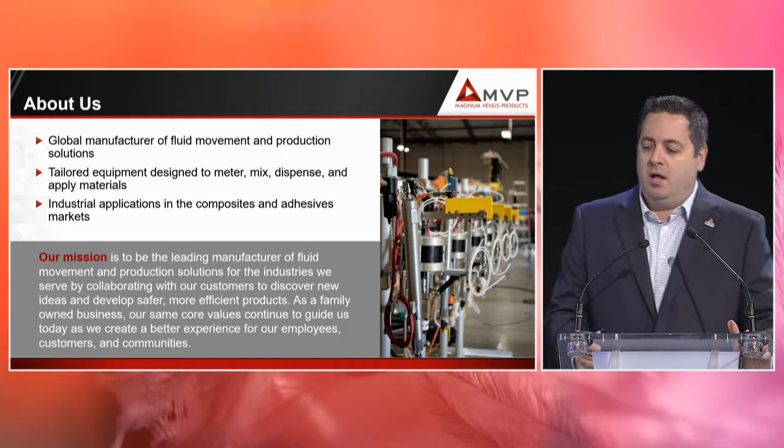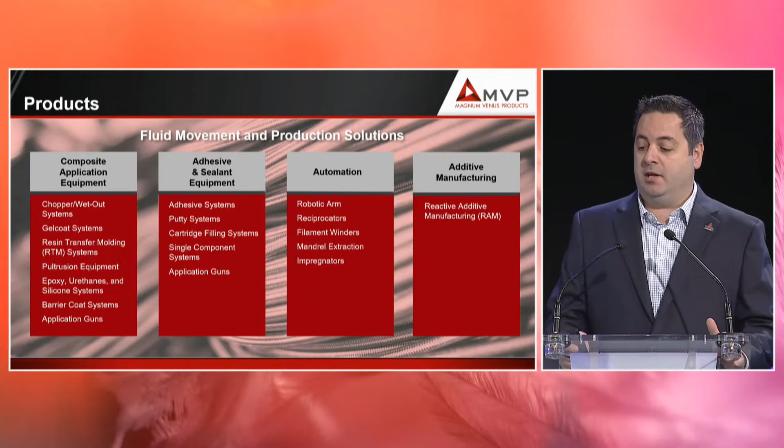Just real quick about Magnum Venus Products. We are a fluid movement machine company. We tailor different units and machinery for precise metering and mixing. Our company is split up into four major buckets: composite application equipment, adhesives equipment, automated solutions, and then additive manufacturing.

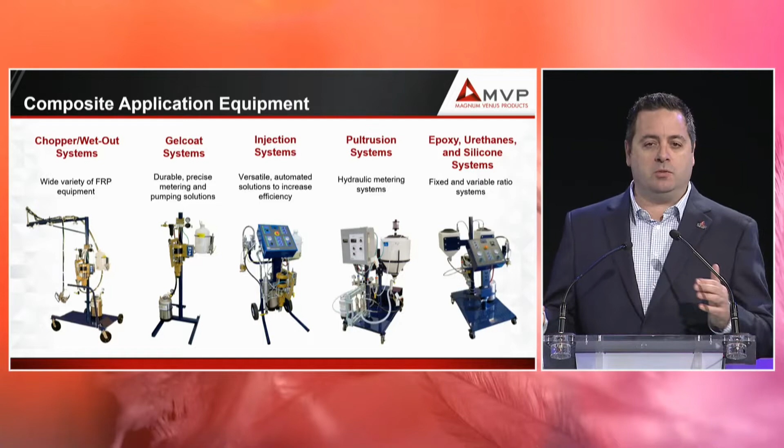Within the composite applications, we have traditional gel and wet out type machines, some higher end injection and closed molding machines. And then adhesives and sealants, we have the things you would think we would have: adhesives and putty systems and single component type machinery. In the automated division, we have filament winders, impregnators, flat panel machines, anything from 2 to 3 to 4-axis filament winders.

And then the additive manufacturing division has two different product offerings: a 4 by 8 foot by 4 foot machine that's 1.3 meters by 2.6 by 1.3 meters, and then a larger one that was sort of our proof of concept with Oak Ridge National Laboratories. And in the middle there you can see it's operated by Siemens Controls, a customized Siemens control package.

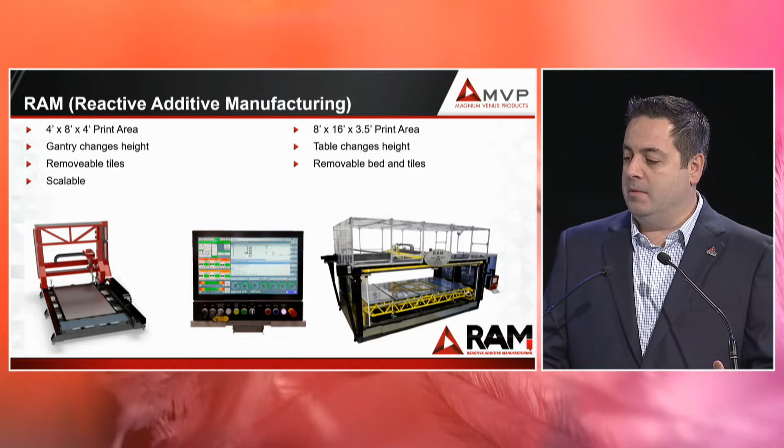So before we get started, I really just want to level set. We're talking about thermosets and not thermoplastics, right? So if you think through what a thermoplastic is, the process of additive manufacturing there for large scale predominantly is you're melting the plastic onto another piece of plastic that's still warm. Whereas in thermosets, it's a chemical bond that's happening. And I liken this to butter versus pancakes, because butter you can heat up and it goes back to the same state, whereas pancakes you can't really unmelt.

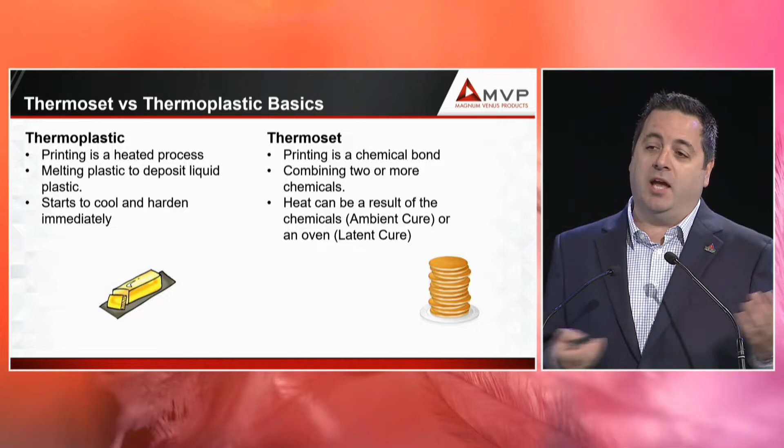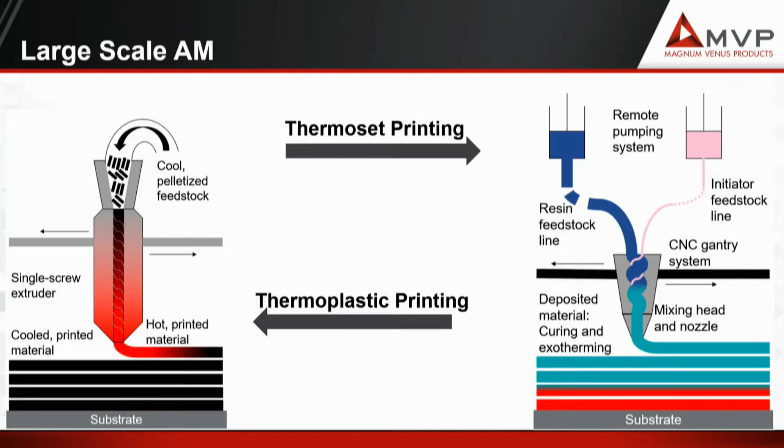To further illustrate this, as the pellets are going in on your left, for a thermoplastic, you're putting pellets in a heated head, and the peak exotherm is at deposition, and then the product starts to cool. In thermosets, you're adding two chemicals or two different materials. It's going down cool, and your peak exotherm, the red, is some time after deposition.

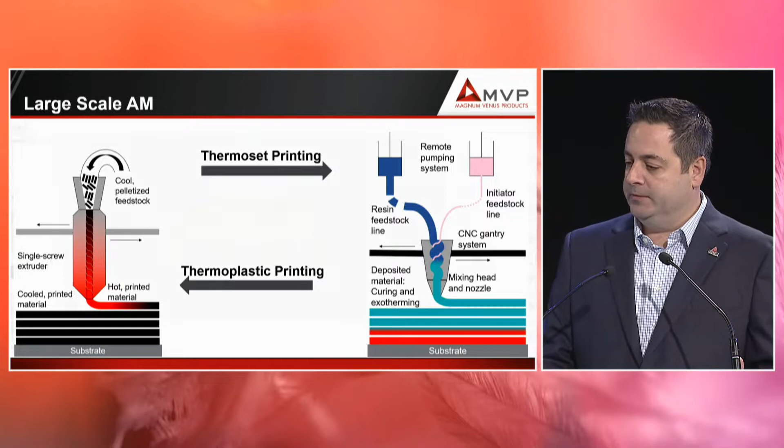To further illustrate that, this is a thermal imaging of one of our processes where you can see the material is going down in this purple color, and you'll see a wave of heat following it. And this is sped up quite a bit, obviously, but you can see that wave of heat that follows the deposition.

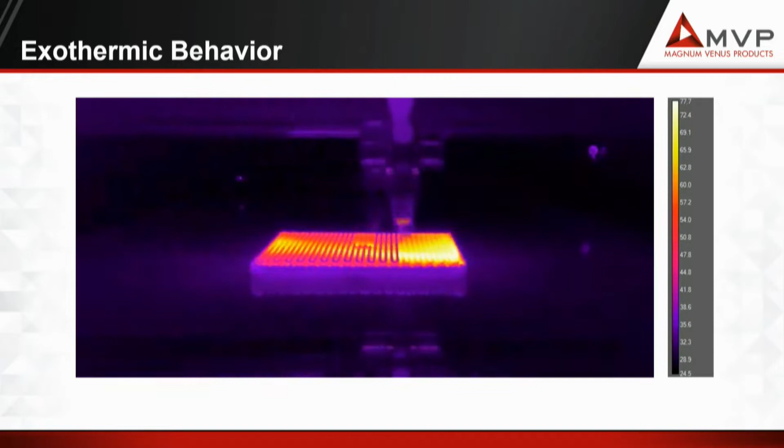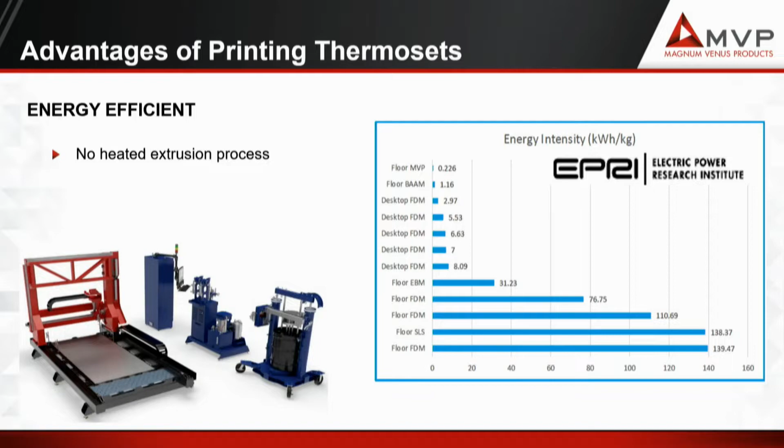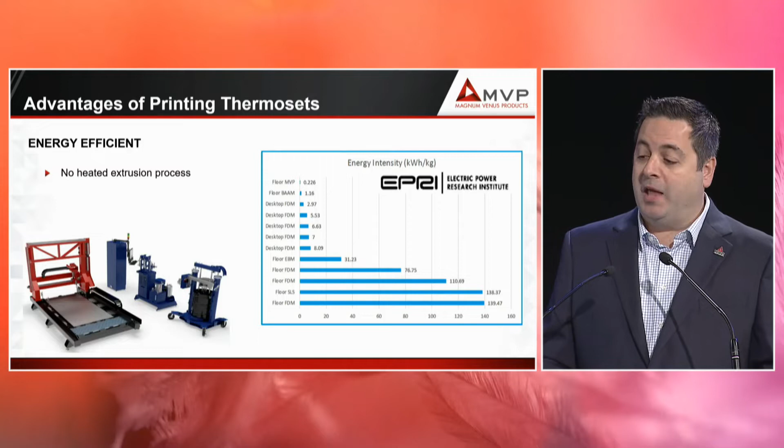So why thermosets? Why start going into this? Well, it is actually a more energy efficient system. You're not having to use heaters to heat up or dry out your pellets. The DOE, Department of Energy, did a study at Oak Ridge National Laboratories and found that we were 5 times more energy efficient than any other machine that they had tested, which included a large-scale thermoplastic machine. But that's really not the most exciting part.

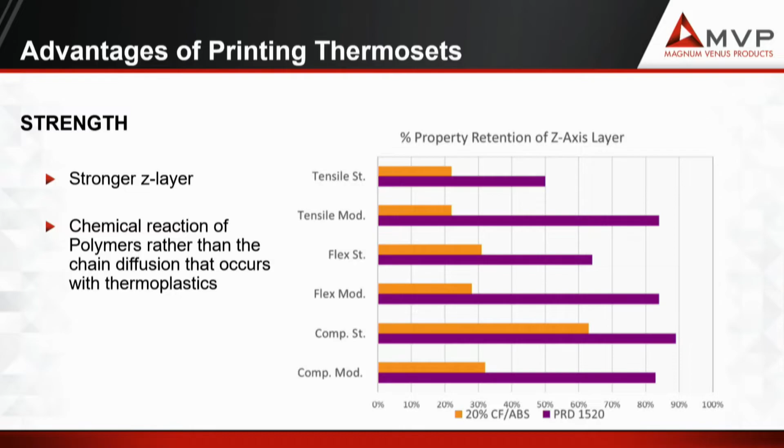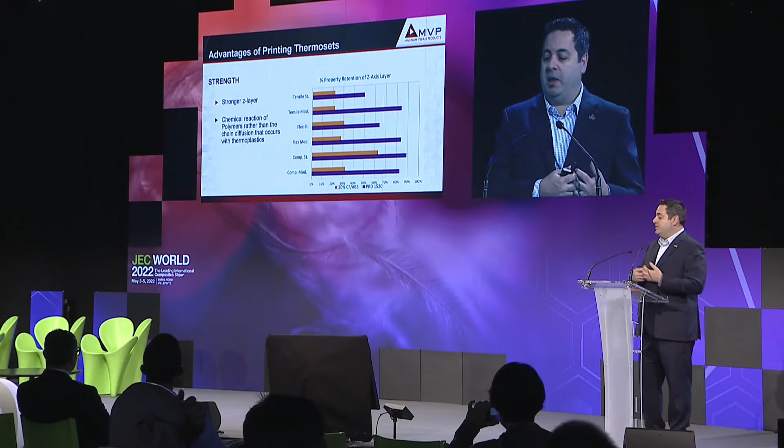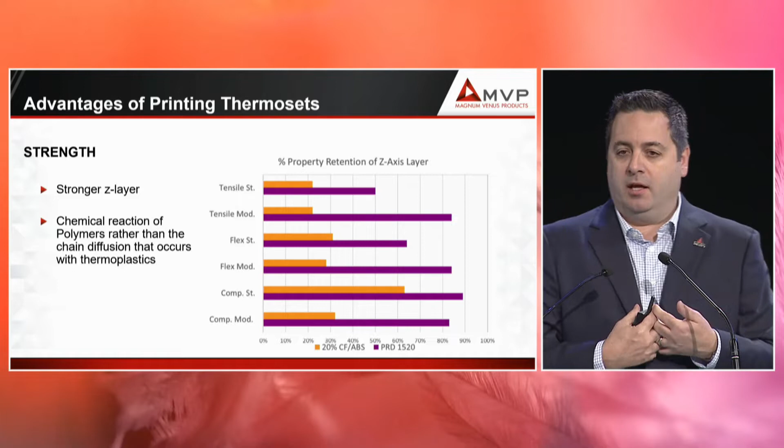One of the biggest advantages of using thermosets is a stronger Z-layer strength, the Z-layer meaning the bead-to-bead interaction. And again, this comes from a chemical reaction, not a thermal reaction. Some test data here: the orange represents 20% carbon fiber-filled ABS versus base material from Polynt, PRD. And you can see the tensile retention strength properties are much lower in the orange, the thermoplastic, than in the thermosets. It really comes down to this: at the molecular level, you're entangling the fibers, you're entangling the different molecules.

Thermosets are also more heat tolerant. You have a higher Tg in most cases with thermosets. You also have a reduction in thermal expansion. So with the product that you're printing, and we've done mostly molds to start with, as you're using the mold, it heats up. As the mold heats up, you start to get expansion, and this has been a big problem over the decades we've been using them. With thermosets, you're getting less of that.

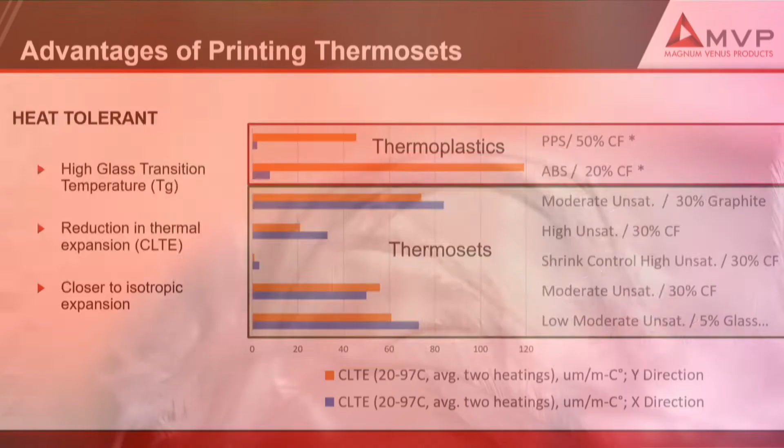And so this graph illustrates in the orange the Y direction expansion versus the X direction. In the top two examples, you have this really short expansion in the X direction and a longer expansion in the Y direction, in many cases 10 times more. That's really because as you're printing, the fibers contained inside the material are lining up in the X direction, and they're holding back that print. They don't do that in the Y direction, so you get this enormous distribution of change in your print or in your mold, whatever it is.

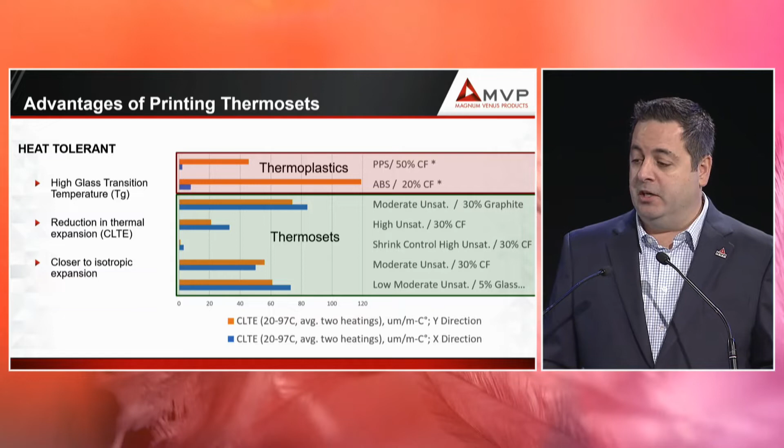In thermosets, that retention is much higher because of the entanglement and because you're using a chemical reaction. So we're getting closer to isotropic expansion, and we do have a few other experimental materials we're working with that we hope will get to isotropic expansion.

Because there's this chemical bond, you have what we're calling an open layer time, meaning you don't have to come back and put your material back at a time frame in the same way you do with thermoplastics. In thermoplastics, you're melting that material, and you're using that heat, that melting process to put those two pieces back together. In many cases, you have a limited amount of time to come back to that previous layer. Otherwise, you lose the print because there is no retention between those layers.

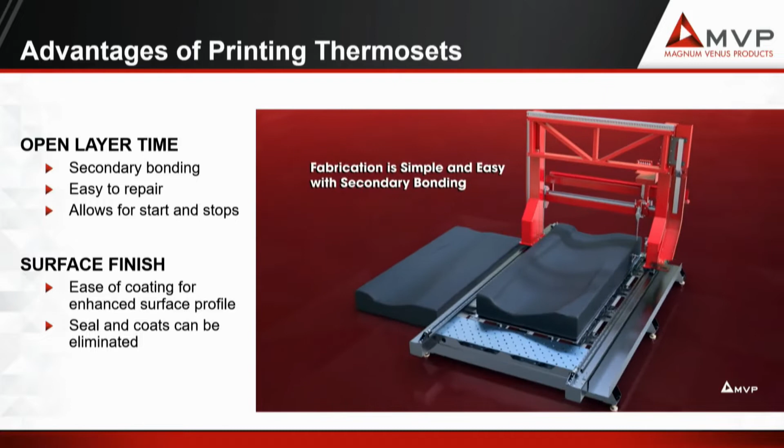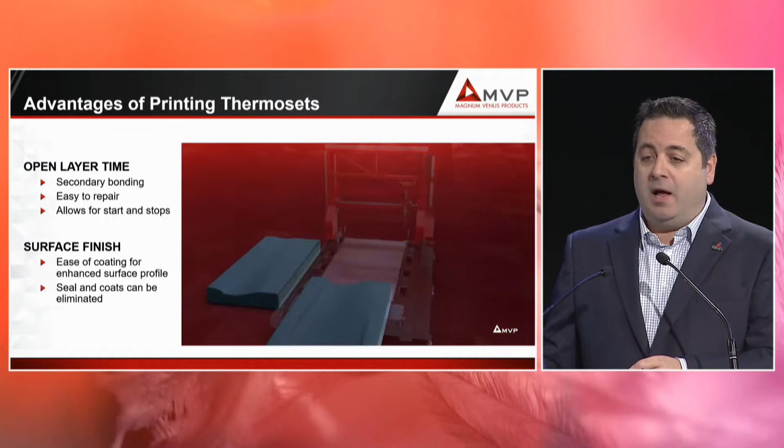With thermosets, you don't have that, so you can literally join two pieces together once you've printed them with the same material. And I have some real-world examples here in a minute. It also allows you to easily modify or repair a mold or whatever you're working with. If you want a version 2 of a part, you quite literally can mill out or break out that part, reapply the same material, and then go back to the CNC machine.

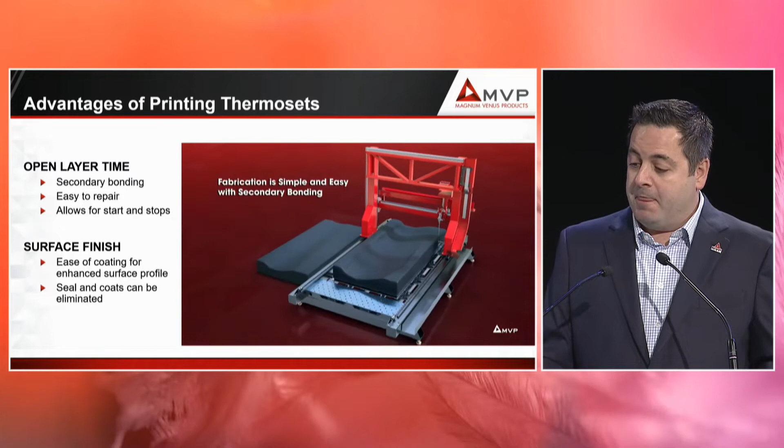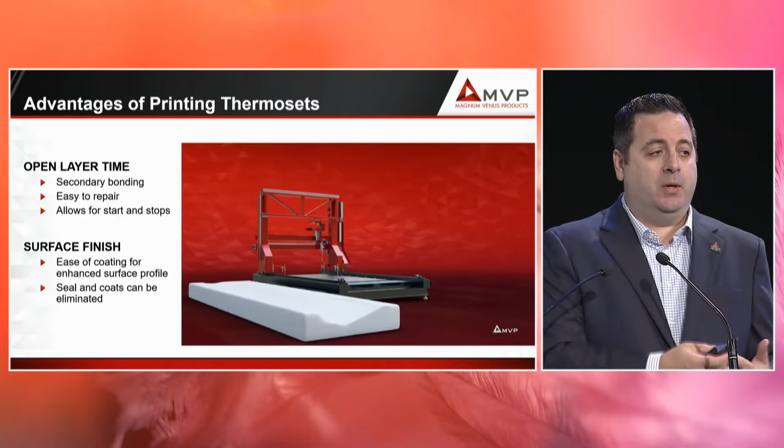It also allows you to start and stop in the middle of a print, meaning you can quite literally print part of your print, go home for the night, and come back the next day and continue printing and still have the same characteristics. And again, I'm going to show you an example of that in a minute here. The open layer time, as well as it being a thermoset to begin with, allows you to have different finishing products put on, or the same finishing products that you may be using in your traditional process already.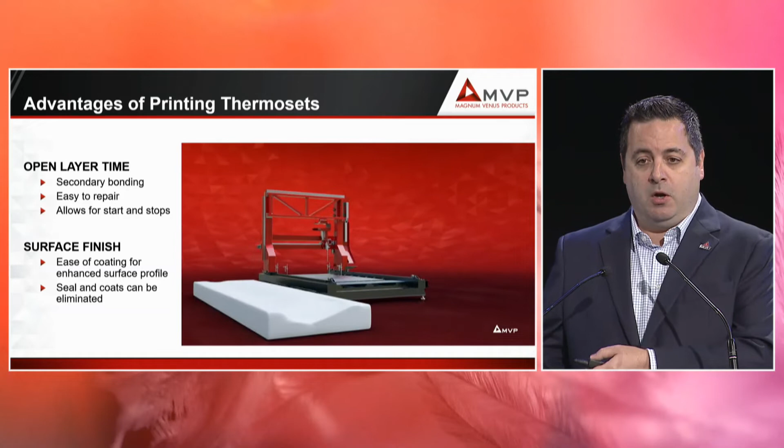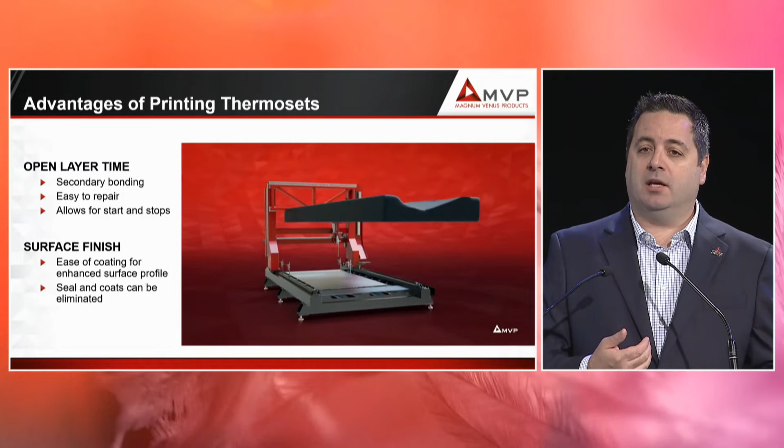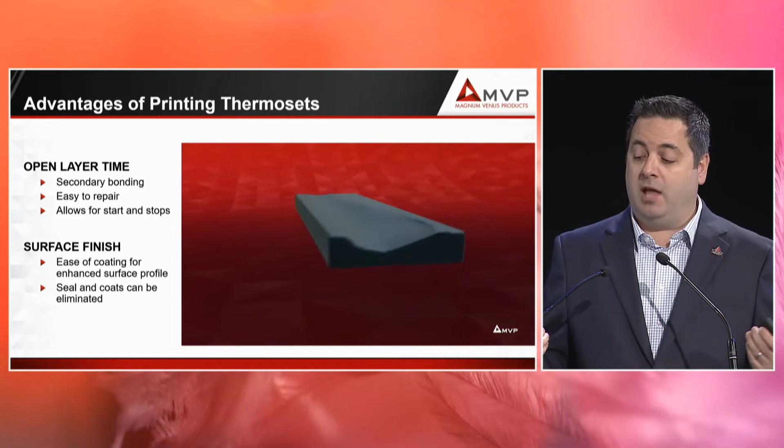Because you're putting a thermoset, a lot of times your finishing coats are thermoset, and you're putting that on to your mold. Well, when you're using a thermoplastic mold, a lot of times you'll see delamination because the thermoplastic is expanding, because that CLTE is much different than your thermoset. So if you're heating that mold up or that part up, you will see or could see delamination, whereas you don't see that in the thermosets. As well as it's just easier to apply to a thermoset.

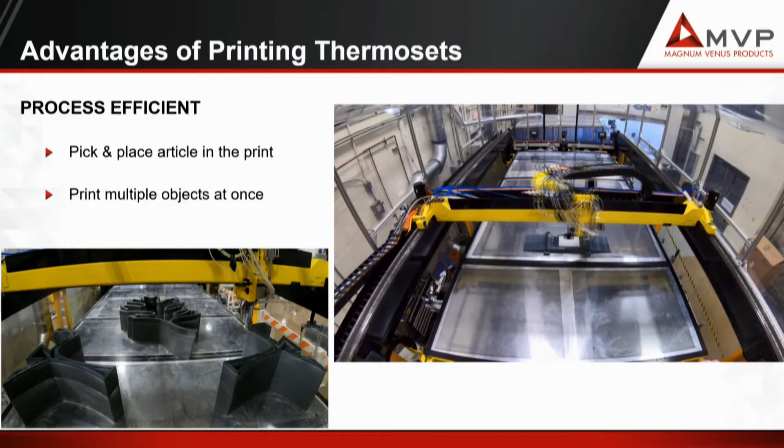The last advantage I have here is you're able to print in multiple parts. In the bottom left picture, we actually printed all 3 of those parts at the same time, each layer as it came up. And as you can see, 2 of the 3 are a mirror image, but the third is a completely different shape. And although thermosets do print slower, you can do multiple parts at the same time and gain efficiencies. You also gain efficiencies later because they're much easier to mill than thermoplastics.

You're also able to pick or index. In the video, you can see there's a square that's being indexed into the print. And the machine actually goes over, grabs a piece of foam, drops it into the part, continues to print, and actually prints over top of it. So now if you're thinking about, say, lightweighting a part, you can drop a piece into it, and you may not need the arm to do it. You could physically put it in.

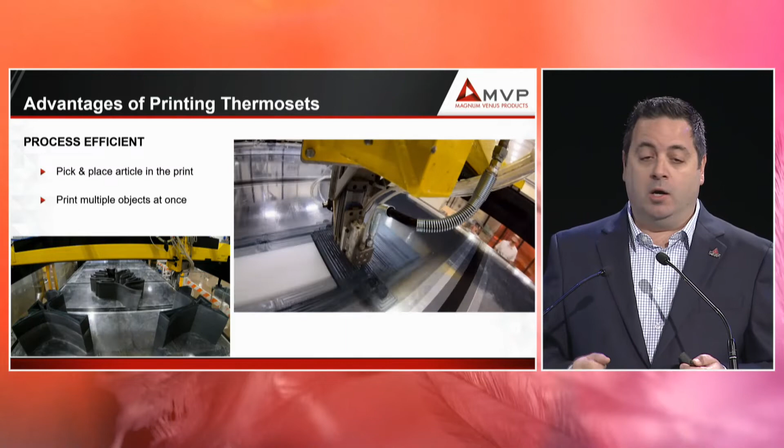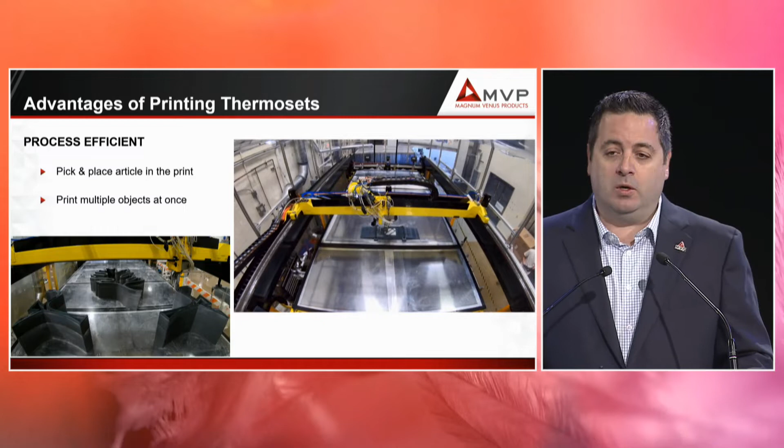Or if you wanted to put in heating channels or cooling channels or sensors to check the degradation of the tool, or sensors to see what temperatures you're at, it's very easy to do with this. Again, it goes back to this open layer time, that you're not under this time crunch to get your layers back on top of each other. And those layers can be tailored whether you want them to cure 1 layer deep or 7 layers deep.

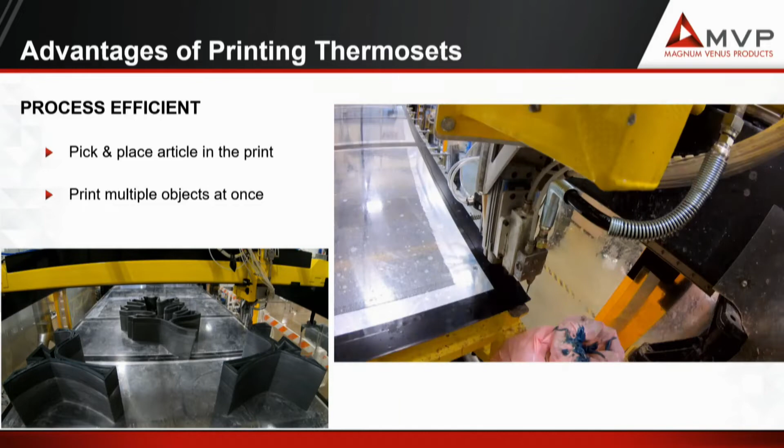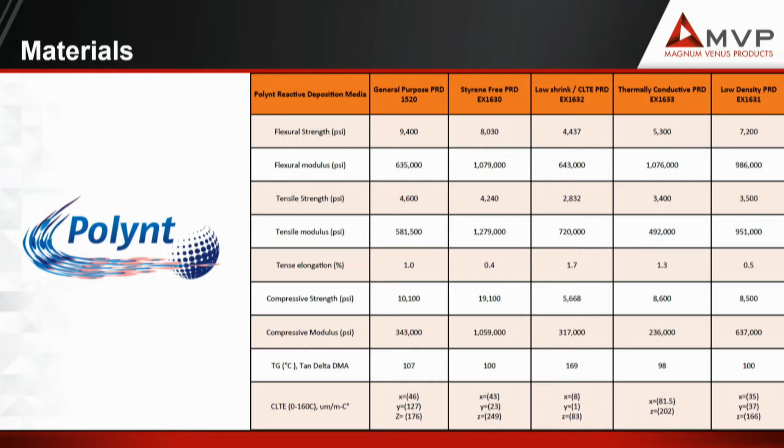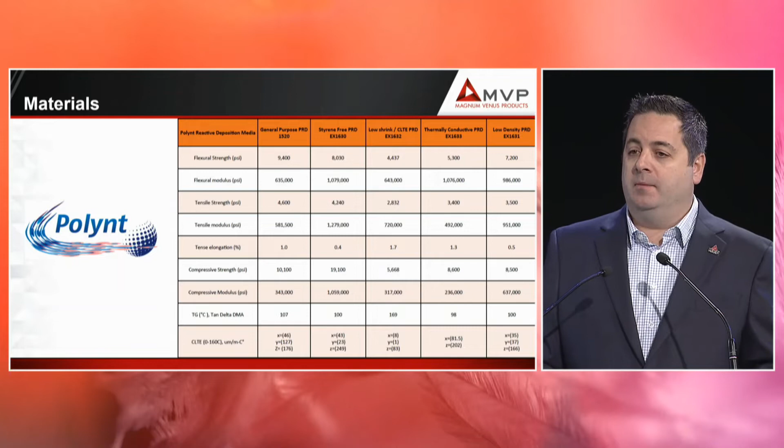We've done material applications on 2 of the materials so far, the PRD 1520 and the PRD, I always forget the number, the 1632, so one is carbon fiber based and one is glass filled. But what's really exciting is the middle material: you can see on the bottom the CLTE is very, very small, and this is approaching aluminum in the sense of the expansion rates that you're seeing in tooling, as well as the TG, the temperatures you can produce to. So we're at the low end of autoclave tooling and have plans to be into full aerospace autoclave tooling with the pressures.

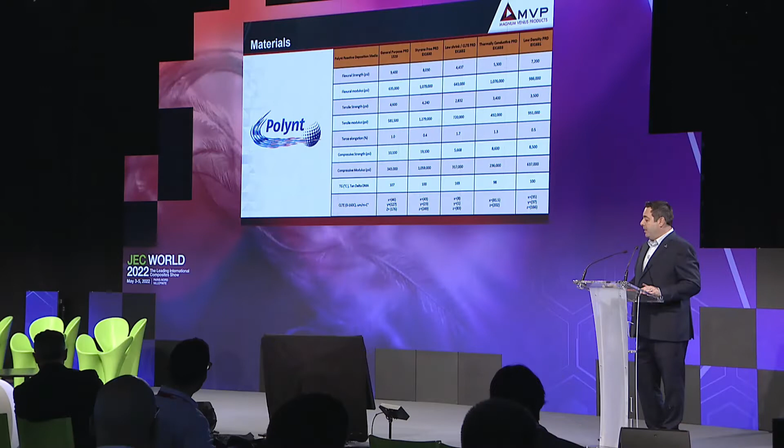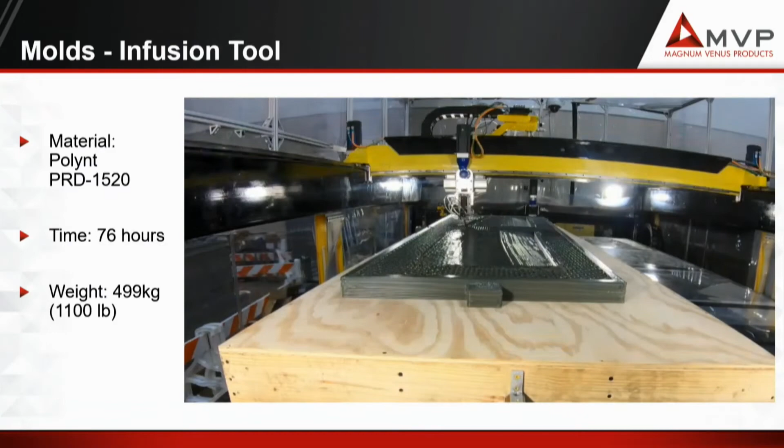So this is an example of one of the molds we've produced. This was an infusion tool. This print was done with the PRD 1520, and the print time did take 76 hours. So that's the actual print time that we were laying down material. But the actual time this took was about 3.5 weeks, because this was printed in coordination with Oak Ridge National Laboratory. This is the first machine that we put, and they've helped collaborate with us.

But in the middle of it, the operators were put into COVID protocol, and they literally could not get in the building for 10 days. And right about here, actually, it's right in the middle of it, we had to stop the print, and we came back 10 days later and started to print it. Now that was not planned, but the print still worked.

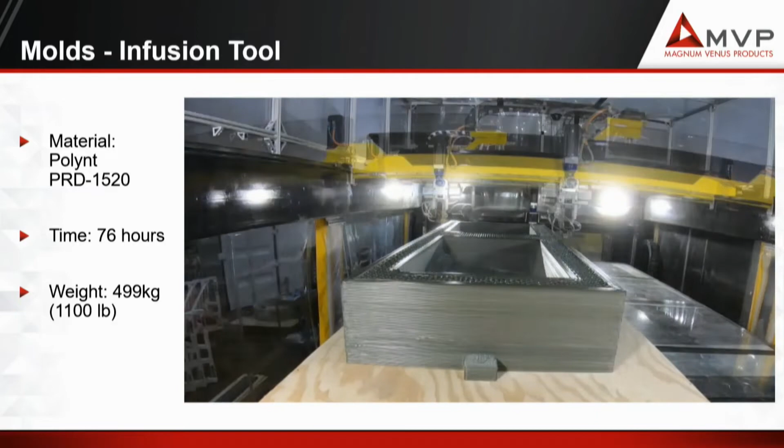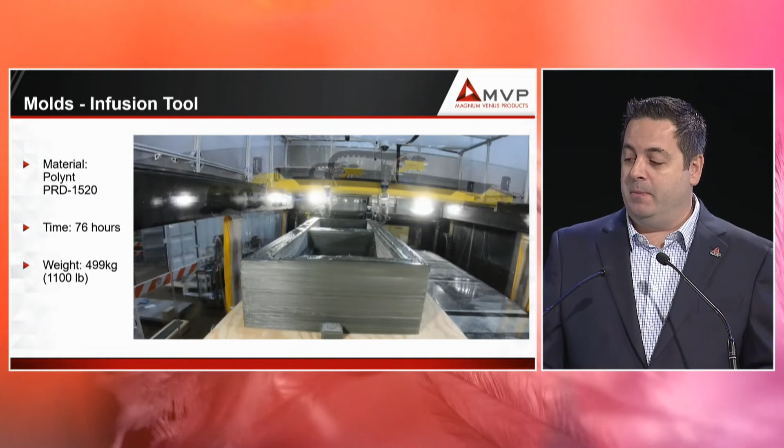You can also see the lights kind of going off and on there. Now some of the times they were working in the middle of the night and the lights were going off, but other times the first couple days they printed and they went home and they came back and printed. That was planned, but the 10-day COVID was not planned. And this print did end up being just around 1,100 pounds. The dimensions on this: it's 10 feet deep into the screen, about 3 feet wide, and about 2.5 feet tall.

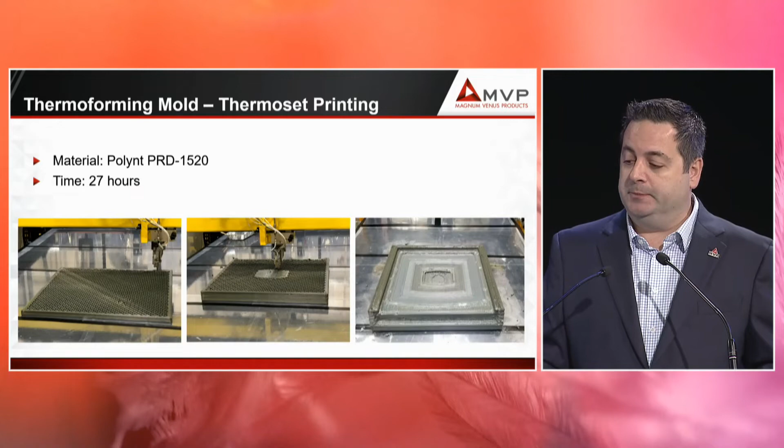So then that mold was taken to a CNC and was done on a 5-axis machine here. That took 16 hours. And again, as I mentioned before, the milling on thermosets is typically faster than the printing. On thermoplastics, it's just the opposite, because in many cases, as you're milling, you're heating up whatever material you're milling, and the thermoplastic can't withstand that heat. You'll quite literally melt it again, like the butter. And so you have to go much slower on that. And in many cases, milling in a thermoplastic is anywhere from 2 to 5 times what it took to print it.

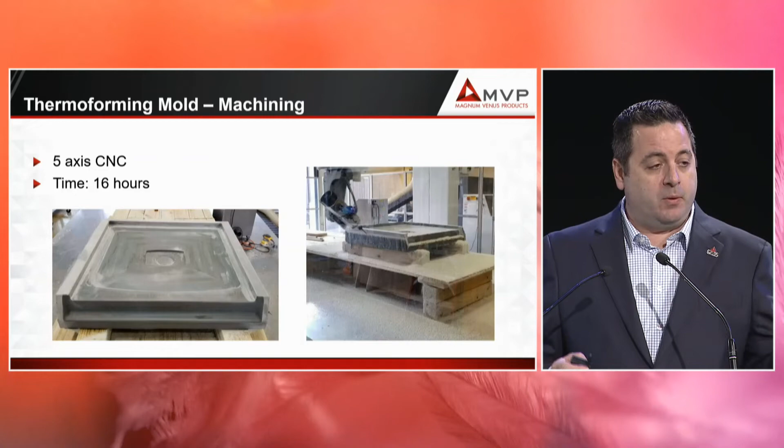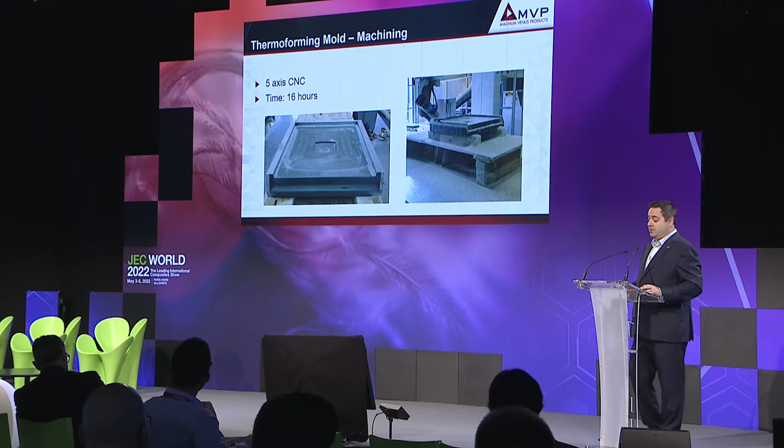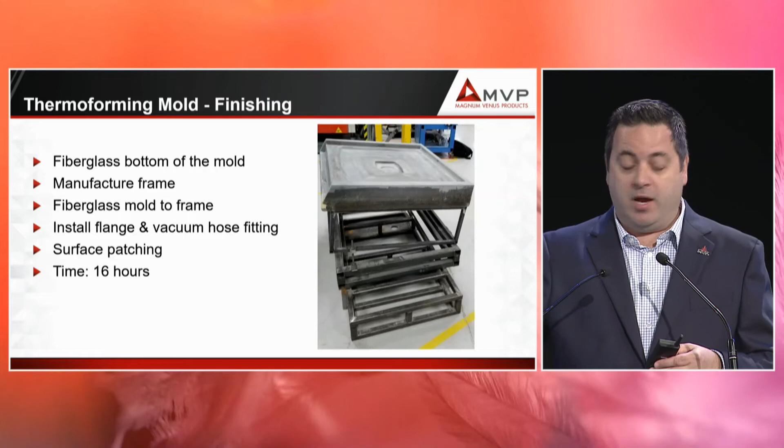And so if you think about this, the timeline of going from a CAD file or an idea all the way to the end product, there's 9 to 11 steps that you have to take to get there. And printing and milling is just a couple of them, and you can offset those by different efficiencies. And our efficiency is that you can mill faster and it's easy to mill. So after it was milled, we took it to the finishing shop, and they fiberglassed the bottom to seal it because it did start with sparse. They added ports for the vacuum, drilled some holes and built a frame, and that took 16 hours.

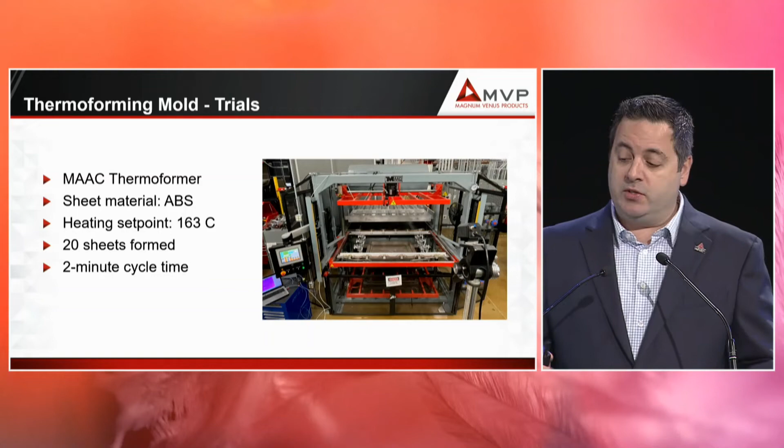So then this is at Oak Ridge National Laboratory where some of the trials were held. Using ABS sheets of plastic, the sheets go in and they're heated at 163 degrees C, and they come out. And the test was done with 20 sheets continuously with a 2-minute cycle time. And this is a quick video of it. On the left is the sheet coming out of the heat, and I'm going to start the other side. And the other side is the thermal imaging of it.

And so the sheet comes down, vacuum's applied, and it sucks it down on there, and you can see it's now formed. The one on the right, that sheet comes out really hot. Again, it gets sucked down, and you can see it cooling. Now this is sped up a little bit on the right-hand side, and you'll see it pop right off there in a second. It pops off, and the cycle continues. Again, every 2 minutes that goes through, and the mold is still in use and still able to be used.

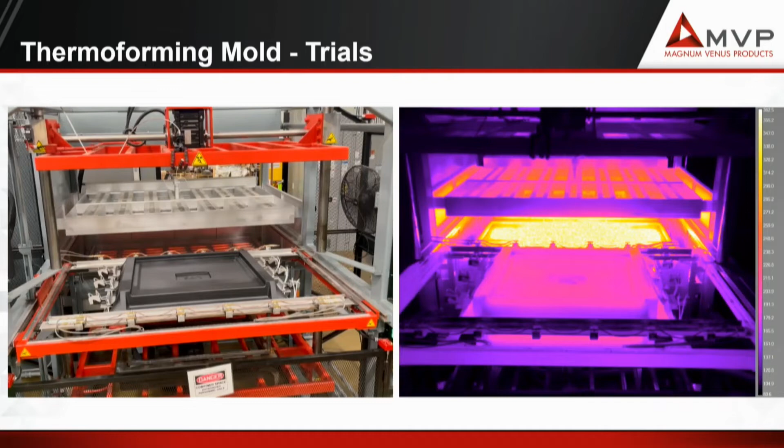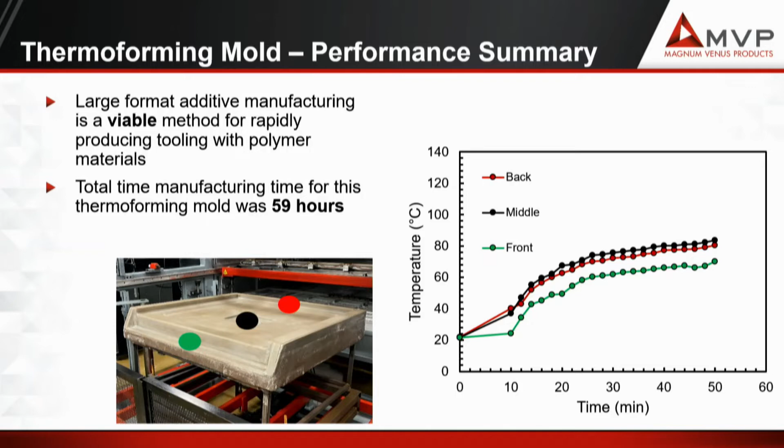So to complete that case study, it was found that this is a viable way to produce a mold, and the total time took 59 hours. And you can see we did measure temperature over the period of the trials, and no part of it ever reached above 100 C.

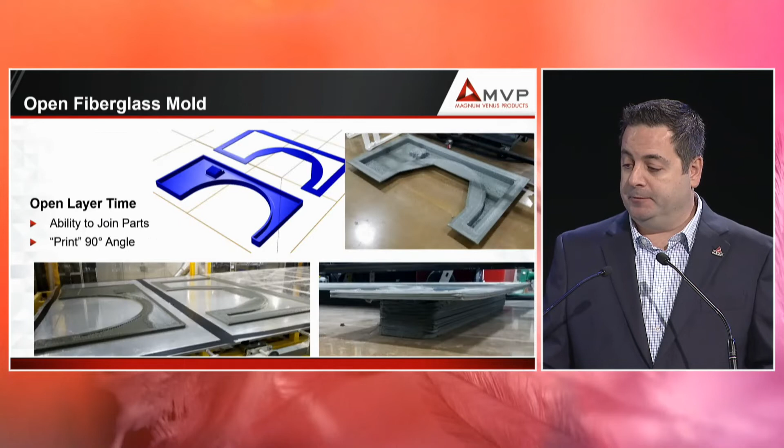As I mentioned earlier, you're able to do multiple parts at once. So this was a mold that we were an ACE finalist at for CAMX. The mold here is a traditional open fiberglass mold for a wheel well. That's a wheel well of a mobile home. And it was printed in 2 parts, as you can see both in the illustration from the slicing software in the bottom.

So the first couple layers are printed. The flange is done. The walls of the well can keep going up. The walls of the well were finished. Let that start to cure. We picked up the flange, set it on top of the well. We did add a little bit of weight to it to kind of help push down and keep the flange there. And it was able to cure into one piece. And effectively, we printed a 90-degree angle with no support structure, therefore saving weight, saving cost, and really showcasing that a traditional mold can be made very quickly.

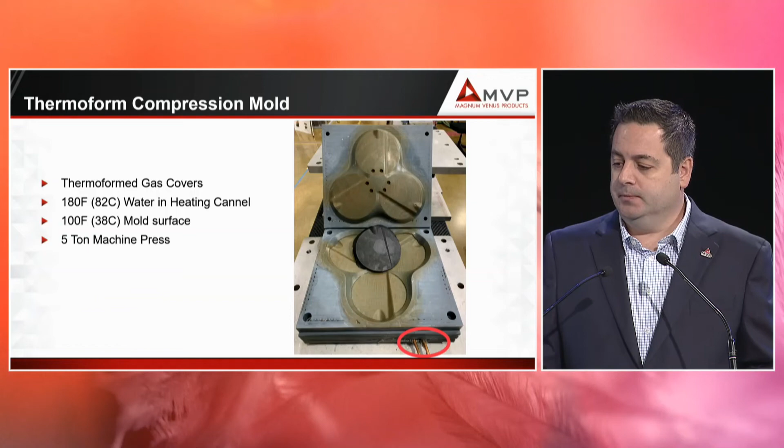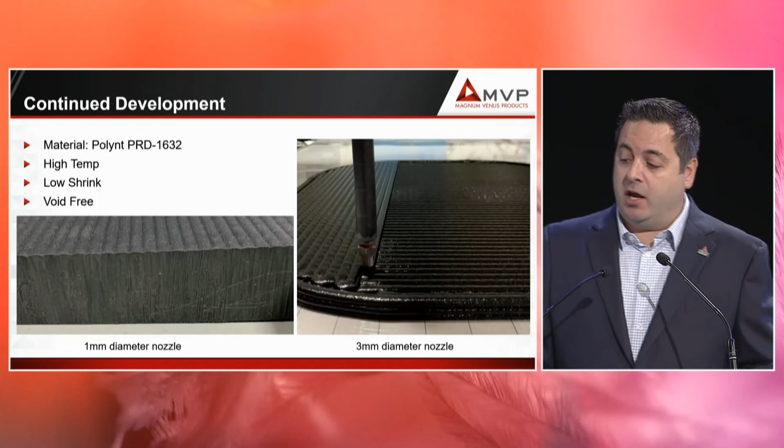So I mentioned that we have a carbon fiber material. This is that, and it's material that we're finishing up some of the application science on right now. This is a high temperature, low shrink material. And as you can see, this was just kind of a close-up of a quick print we did. It's very, very void free.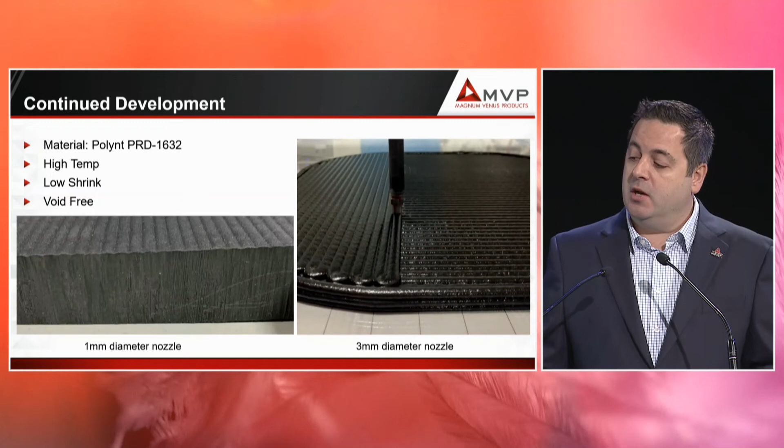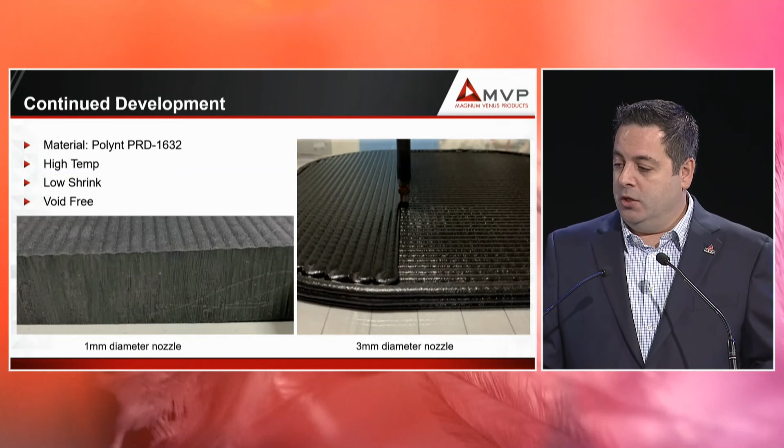The print on the left was done with a 1 millimeter nozzle, so the ridges on the top are 1 millimeter. The print that's going on the right-hand side, that's a 3 millimeter nozzle. So we are able to adjust the nozzle sizes, and when we adjust nozzle sizes, our volumetric output is the same. We just speed up the machine. So there's that.

So in summary, large-scale thermosets, their strength is because of the chemical bond. They're very heat tolerant because we're using thermosets. One of the key advantages here is this open layer time. It allows you to do a lot of different things like picking and placing items into a part, joining parts together, being able to stop the part while you print and go home, have a sandwich, get COVID.

Because you're using thermosets, the finishing is very easy. In many cases, you can just mill it and sand it, and it's good, as in those carbon fiber gas caps, or you can apply and get a Class A finish. And there's a lot of different process efficiencies, like printing dual parts or multiple parts at once. And we have shown through case studies that this is viable, and we have used them in production. And it does save time and cost.

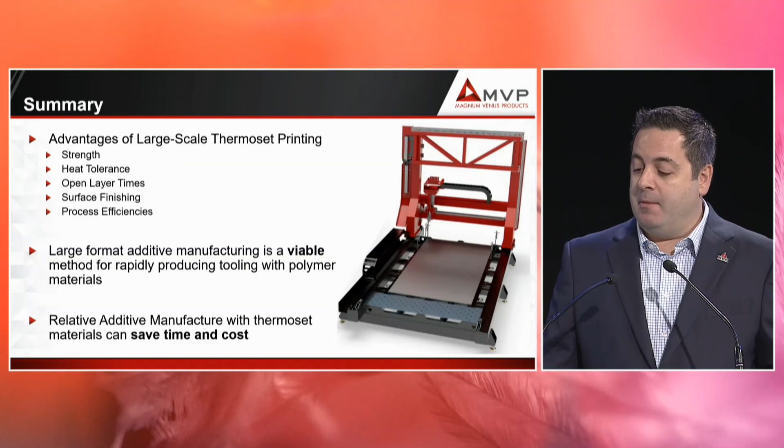In many cases, the time to produce, I should have said, the shower pan mold took 6 weeks traditionally to make. We made it in 6 days. We've made some prints recently for a customer. It took them 6 weeks to get an aluminum mold. They printed and milled it in 1 day. So the time and cost savings is large.